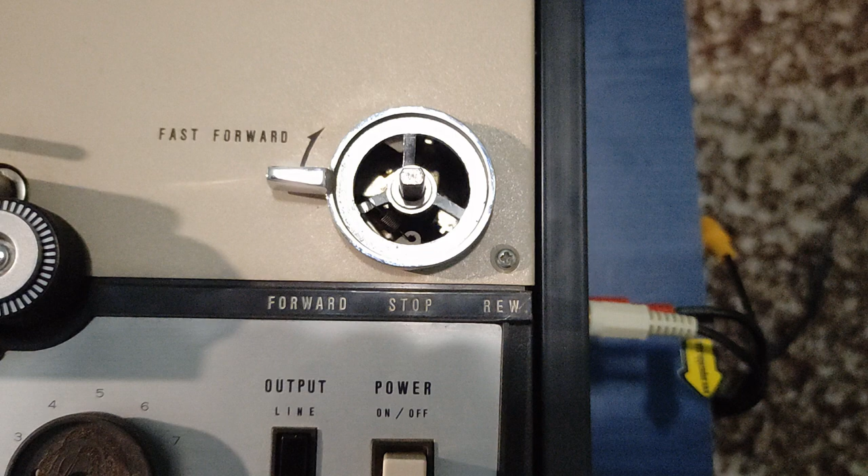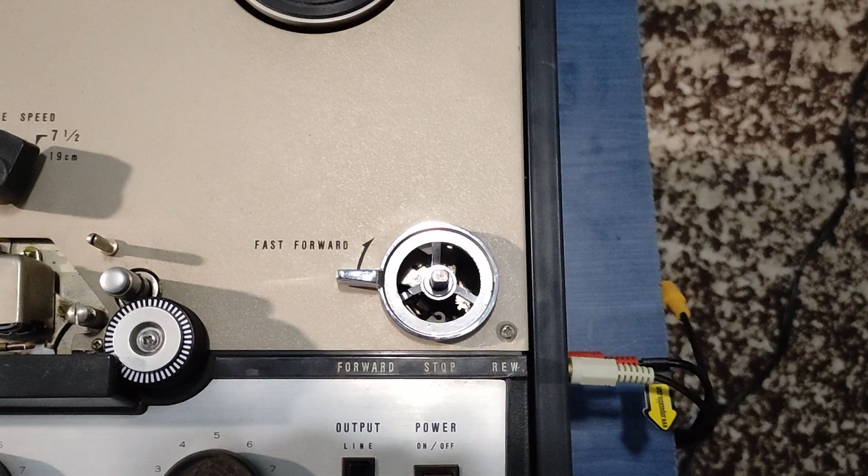So that thing here is missing. I will measure it, the height of it and everything. And I will show you the complete procedure of how to design it in Tinkercad, which I think is the easiest way. The user interface is very easy for anybody to try and design 3D parts.

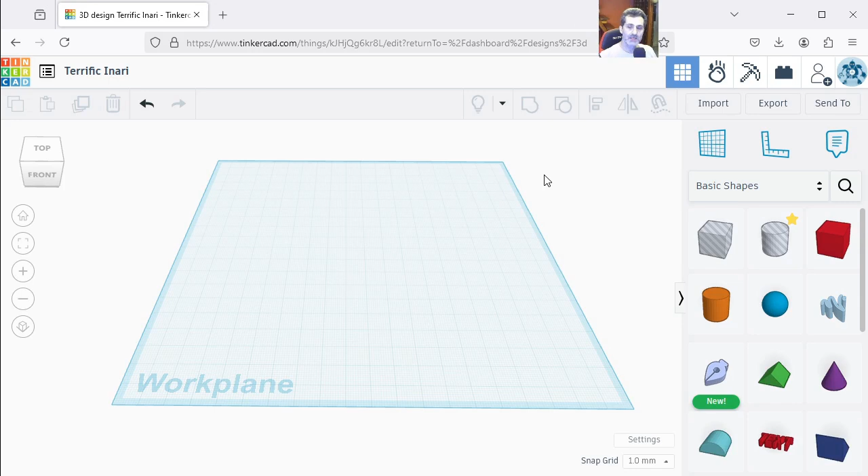So this is the initial screen we are presented with when we start a new design. Here we have a randomly given name. I will change this to SONY TC200 lever, it's called, anyway, whatever.

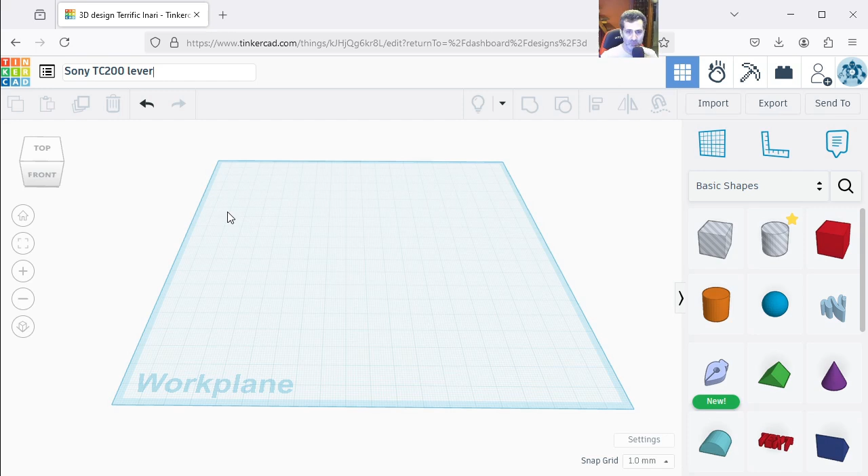I will go now through the whole procedure. So we have an empty workspace here. We can zoom in and out, experiment with the buttons and find what does what. We can rotate it like that, and we can move it. So I have here the measurements, I don't know if they can be seen. Okay, but look how it is. First, I will go through the whole procedure and I will talk, expressing my thoughts all the time so that you get familiar how that thing works.

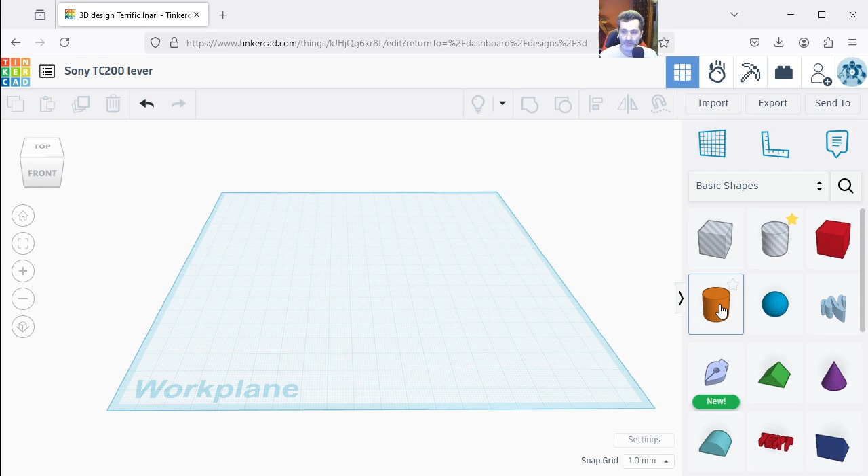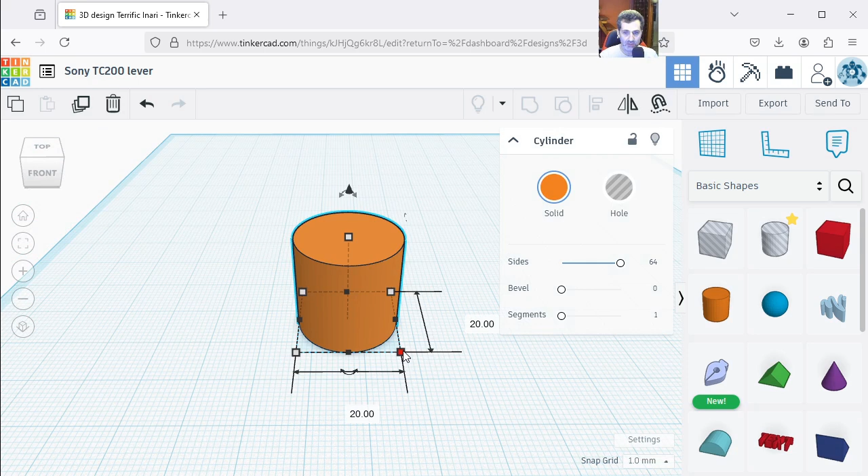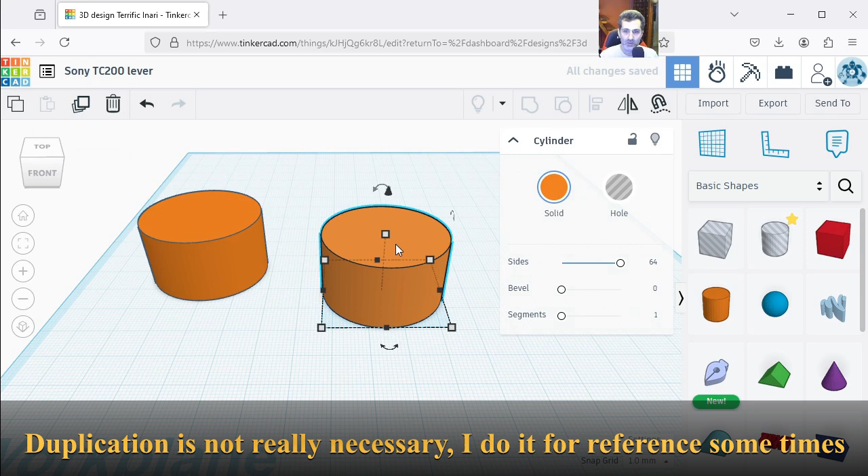So let's put here a cylinder. So we have the cylinder. I do sides to maximum when I insert a cylinder, you see, so that it's completely round. And this cylinder is the outer diameter of the whole thing we have, which is 36 millimeters. And this is also 36 millimeters. I will duplicate this with that thing here, and I will take one part and leave it there. Then this, I will make a height of 2 millimeters.

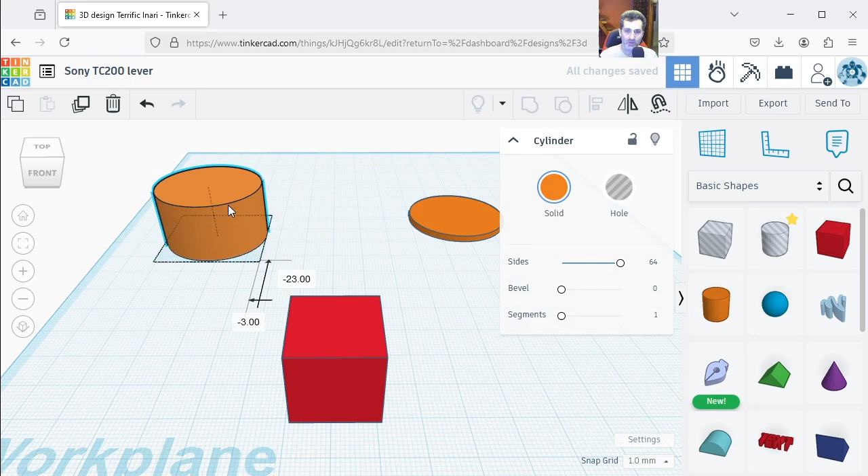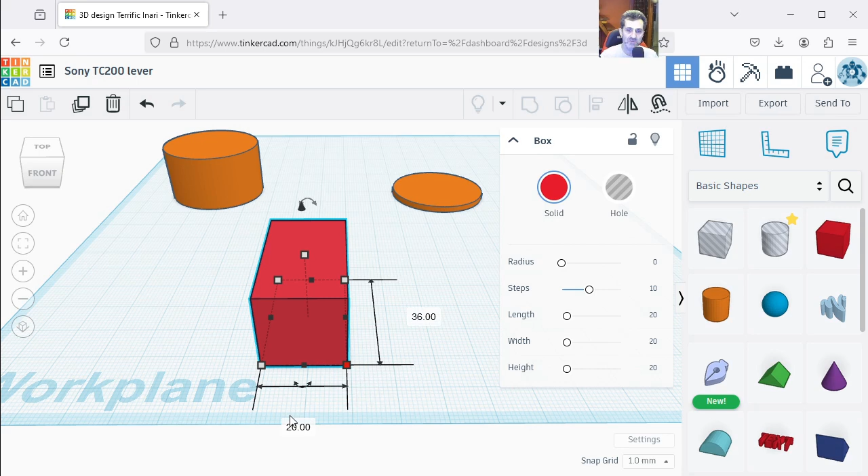Okay, now let's do the middle part where somebody can grab the lever to turn it. I will take a cube here. You can move the object just like that. I will take a cube. This cube, one side will be 36, the other I want it to be... so how much do we need to grab it? I think from 15 would be okay. So that will sort of be here somehow.

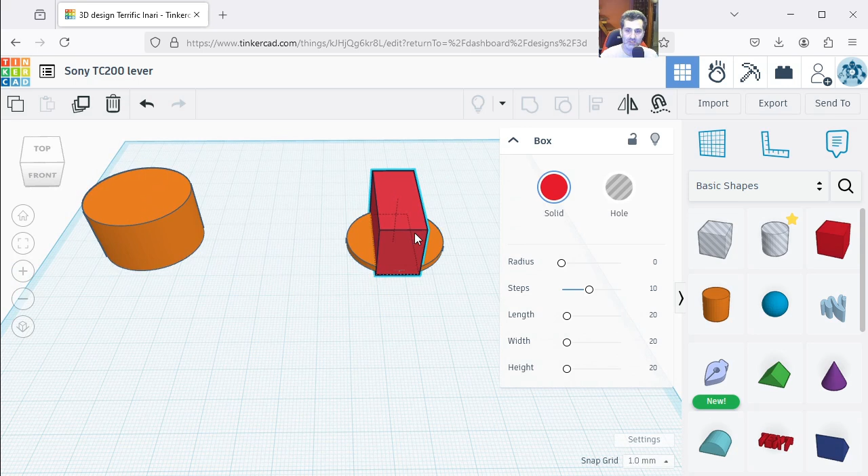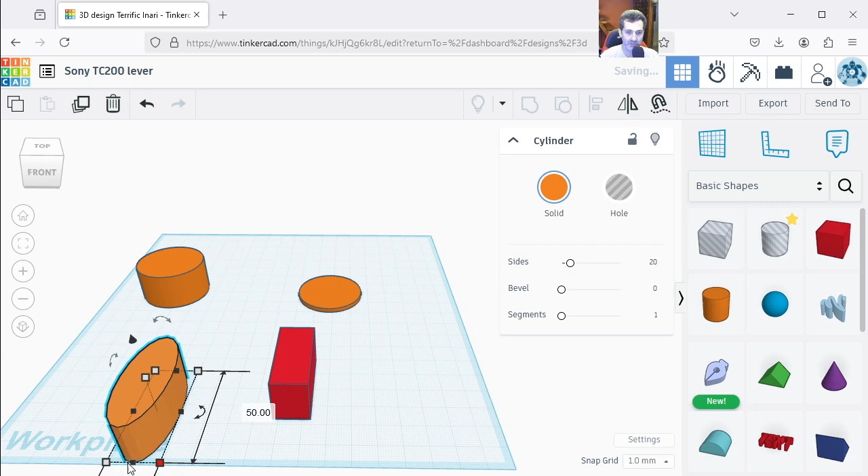Okay, but I want to cut it on both sides to be round like this one here. Let me show you how we can do this. So I take a cylinder here and I will make it big. Let's say 50 by 50.

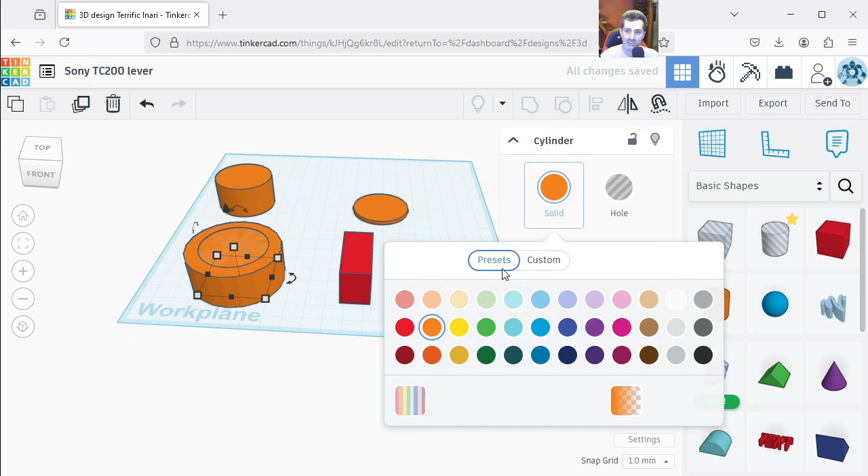Okay, then I will duplicate this cylinder, take it here and put it here in the middle. I will change the color just like that to be able to see it. And now I will center both with this here. I will align them. Now they are both centered. Now the inner one, I will make it a hole.

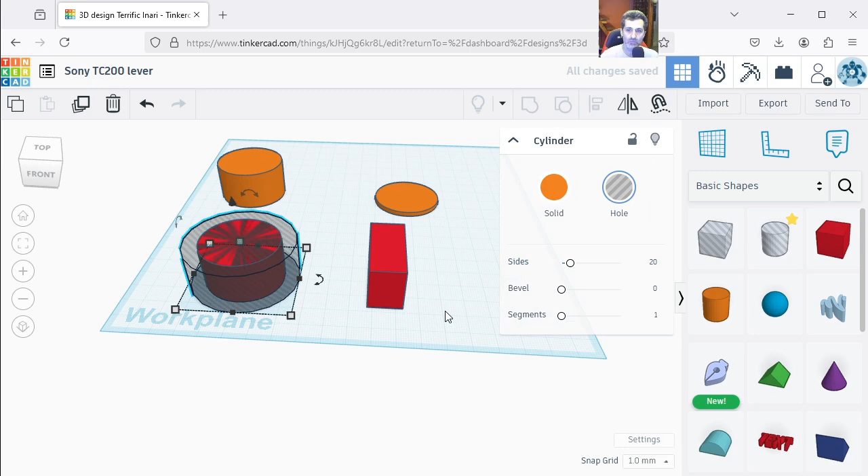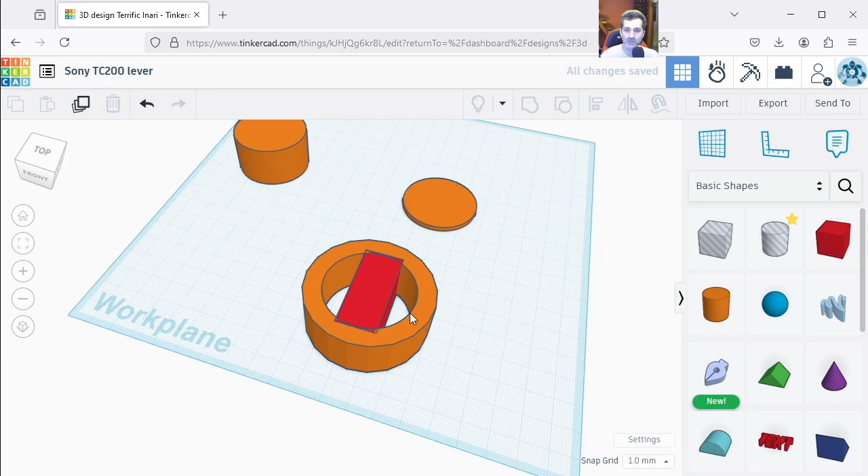No, the inner one should be made a hole, is it? Yes. So now when I combine them, you see the hole is formed here. Now I will put the two here. I will align them just like that. Now they are both aligned, and that I will make a hole. So now if I combine these two, now you see that this is round and it fits perfectly here.

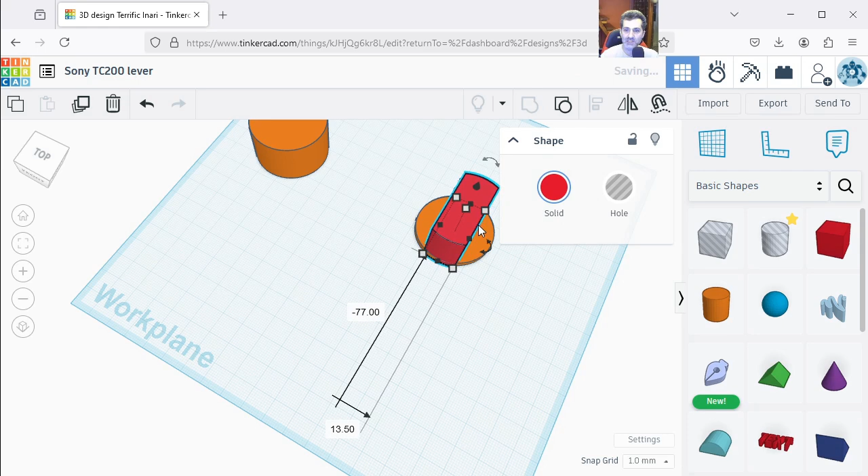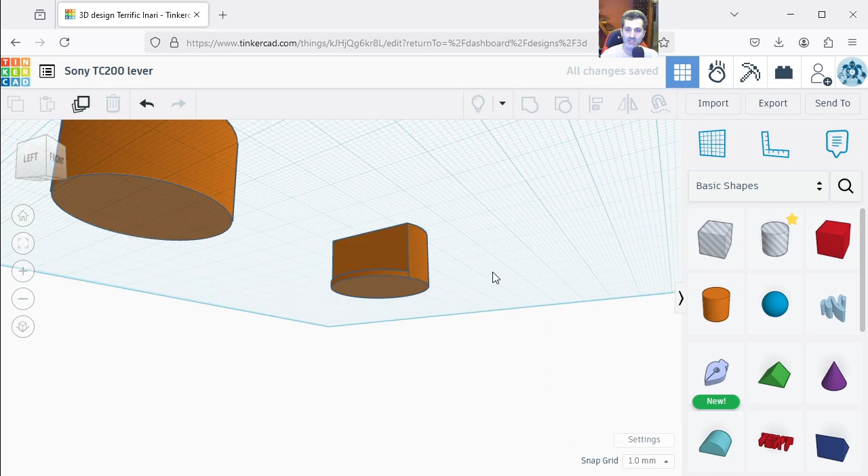Height 2 centimeters, I think it's okay. So now I will align these two by pressing here. You see? Now I will combine them, and I have a basic shape of my lever. I think I did something wrong, because the diameter was 36 and I should do it smaller. So this one I will do it, I have to do a lot of changes.

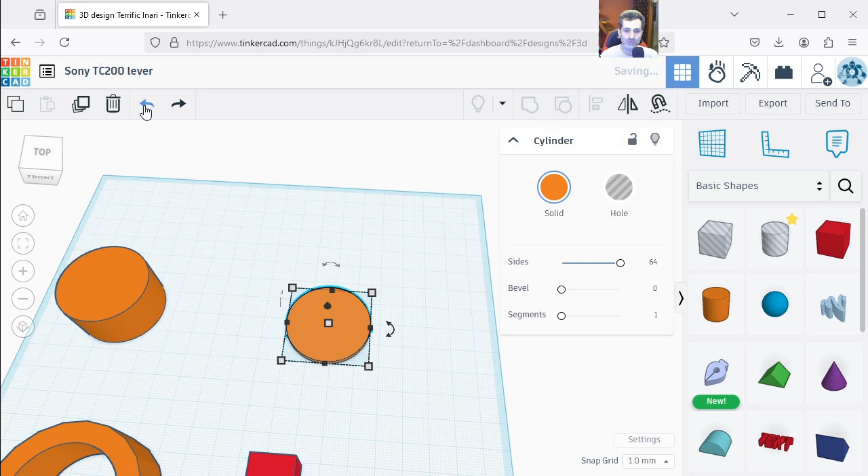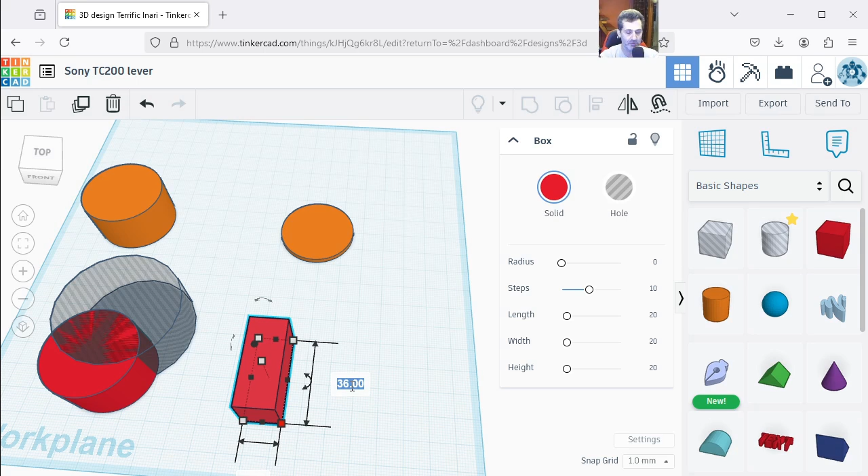I should not do it like that. So this should not be 36 but 35. 36 is the overall we have. This should be, so I mean it must be a little bit smaller so that it fits. So that way it's half a millimeter less from each side, 1 millimeter in total. So this will be also 35.

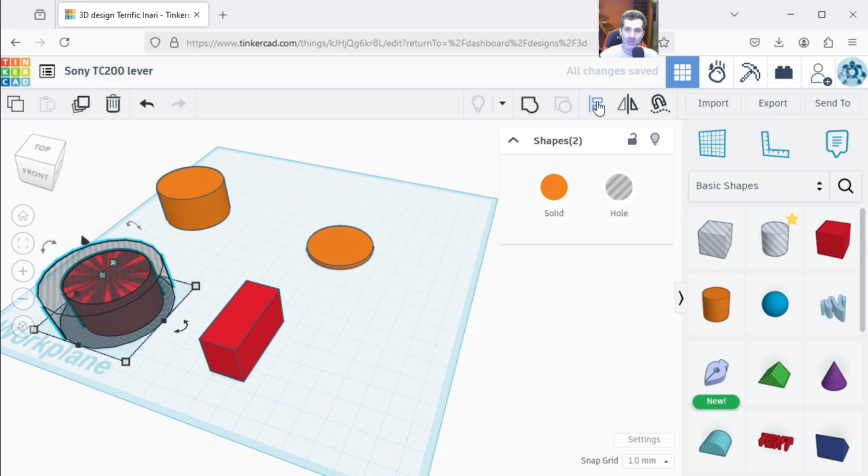And now that one I will do it also 35. That was a mistake I did, but like that you can learn, because we all do mistakes, and I also did a mistake. I will align this again, this side and this side. Now they are aligned. Now I will...

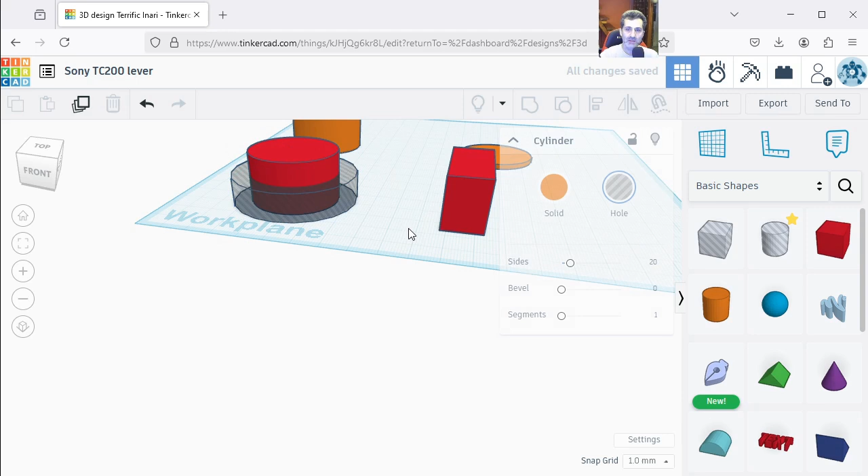Make this a little bit smaller. I will make this a little bit higher, and then in this I will make it 20 as it was from the beginning. Now I will turn this a solid, but this a hole. Like that, when I combine them, I get that hole in the middle.

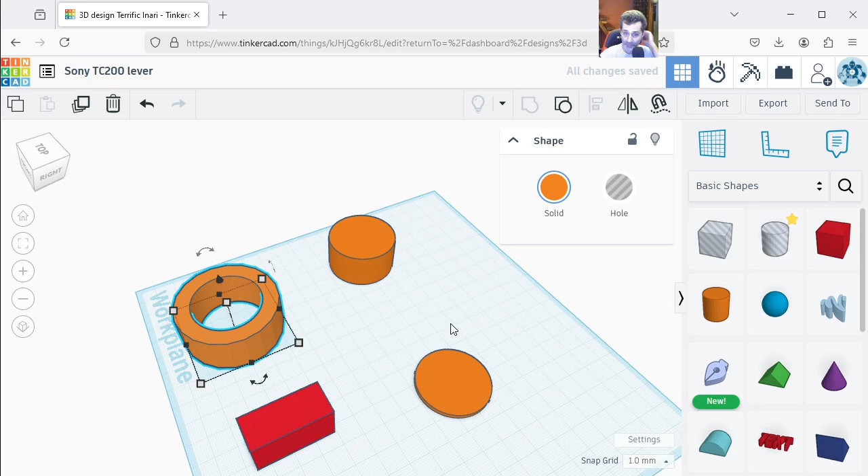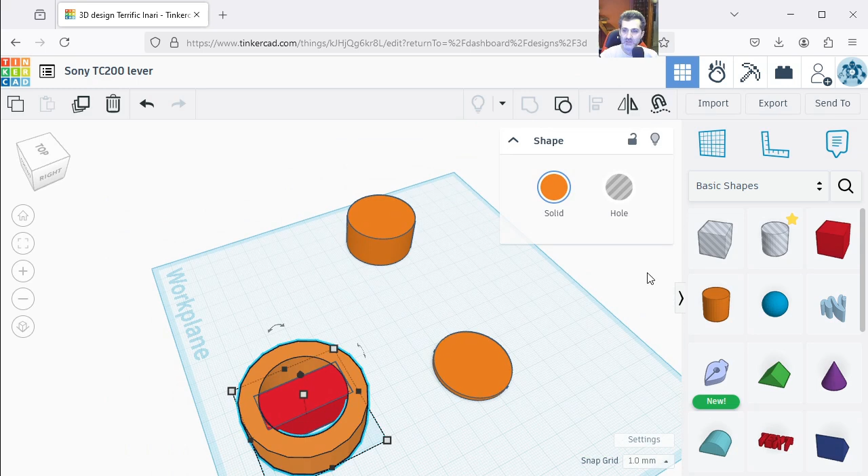Now I will align these two just like that. So this is aligned and this is aligned, so it's aligned from both sides. Now if I turn this a hole and I combine these two, I get the shape I want.

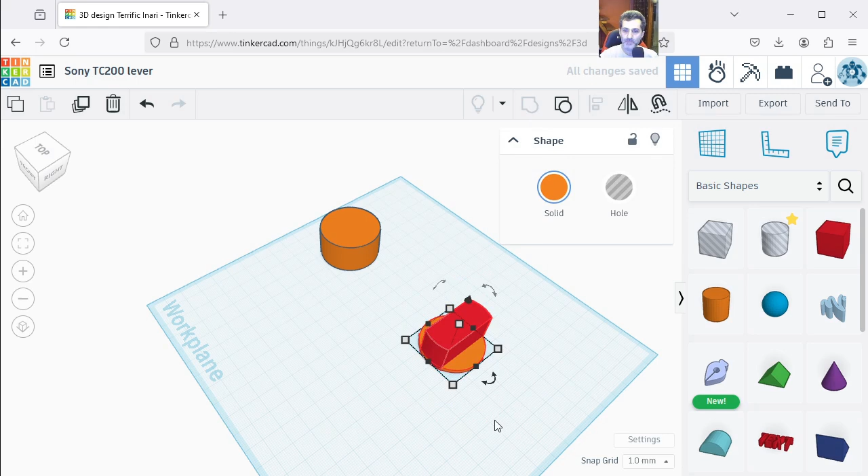Now if I align these two, they are already aligned, and I combine them, please be combined. Yes. Now we have the basic shape of a lever here to turn. Now I have to do the shape of the middle axis.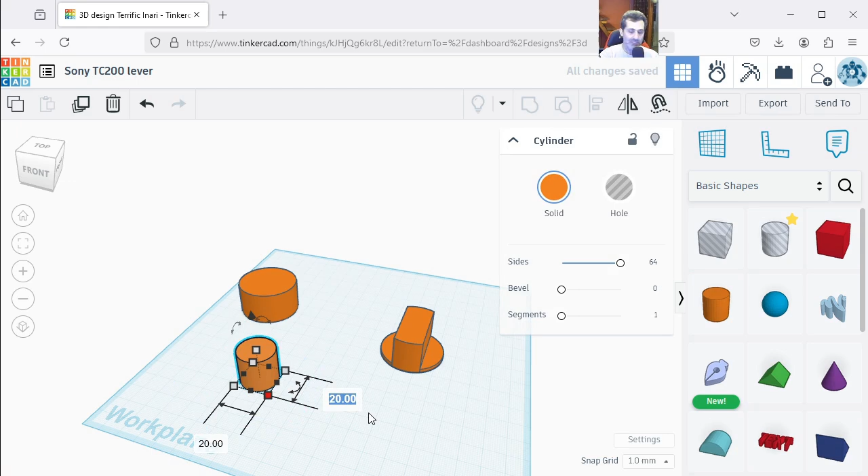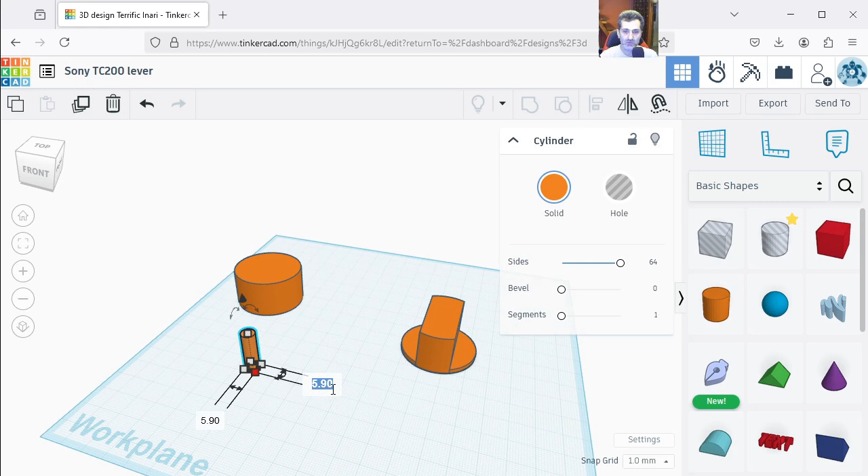Let's see, I will take a cylinder here. So the outer diameter is 6, so I will do 5.9 on both sides. No, if this is 6, that should be 5.9. And I hope that it will fit.

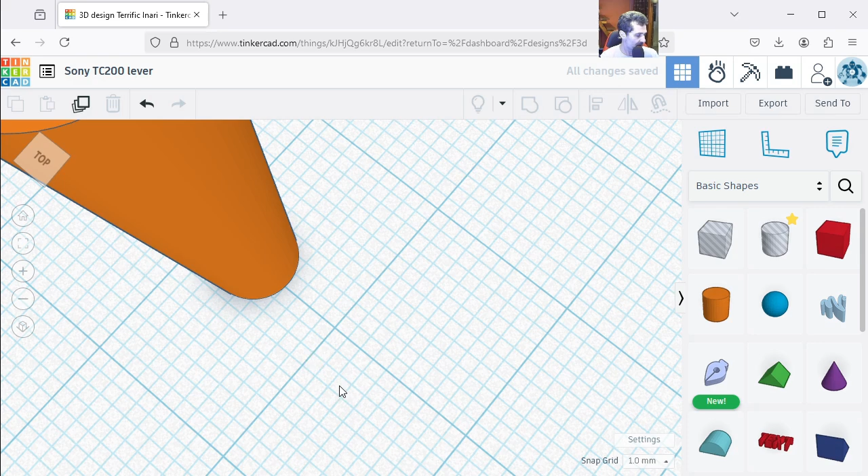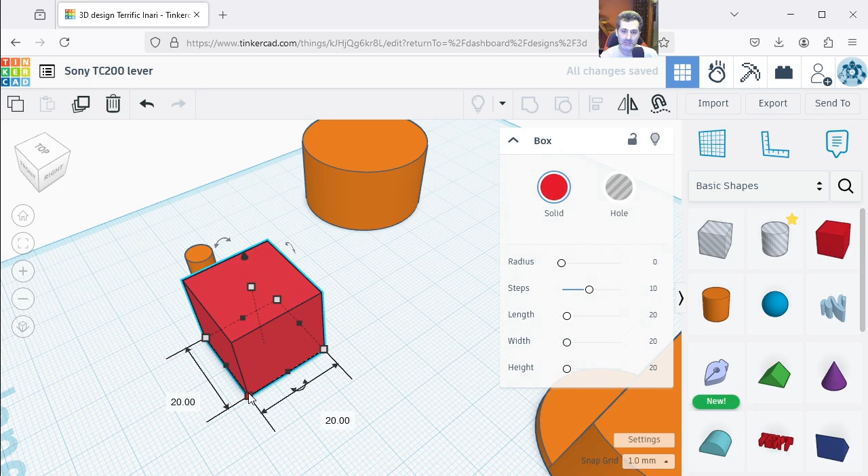Now the problem is that the other part, which should be here and here, I will show you, the other part is 4.5, so I will do it 4 millimeters. Let's see. If I take that, I will do here 10 and 10.

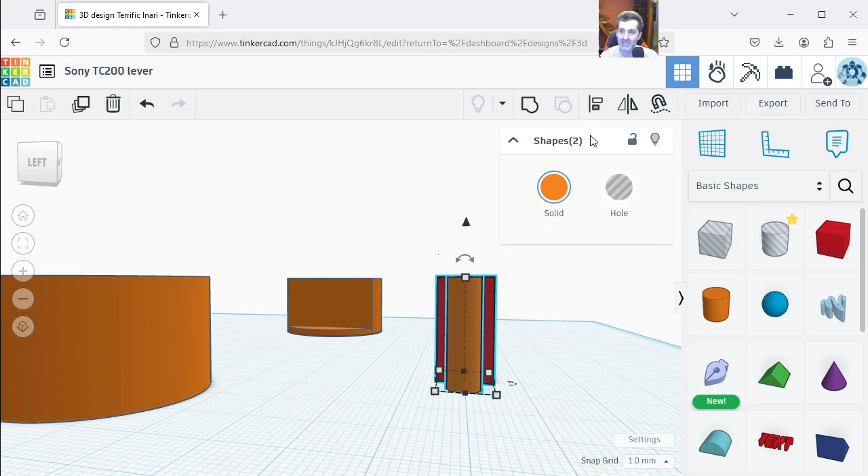Let's see if this line here is in the middle. 1 2 3 4 5, 1 2 3 4 5. Now I will do this, the other one, to be in the middle by aligning the two. Okay, now this line is in the middle of that thing also.

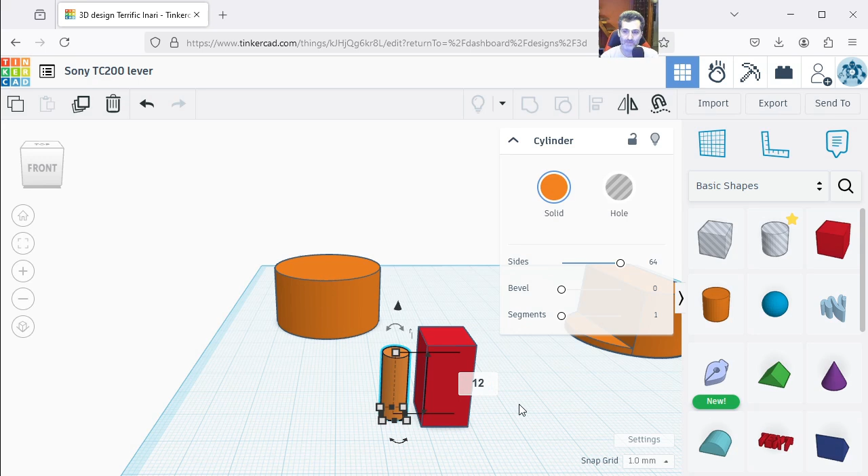Now, so how tall do I want this to be? So the height we have is 13, so I will do this 12. Now, two millimeters this side and another one 2 millimeters this side.

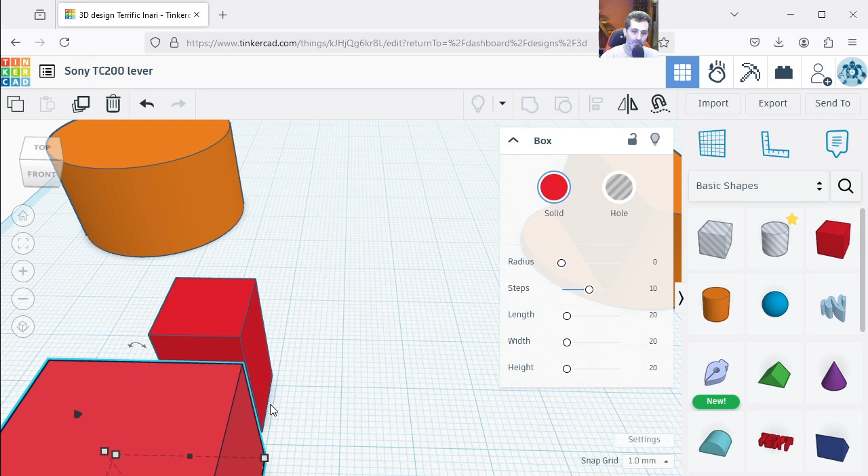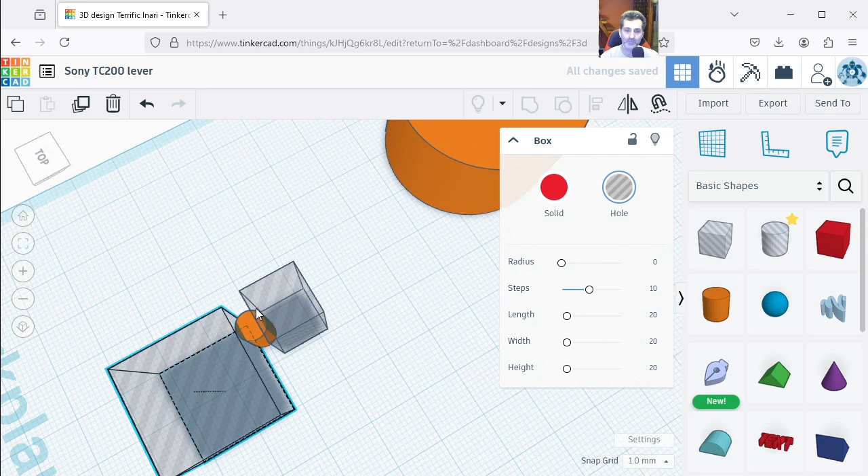Okay, do you see what I did here? So if I turn this a hole and I turn this also a hole and I combine these three, how does this look like? You see, now this looks like the middle axis of the knob, of the lever we saw.

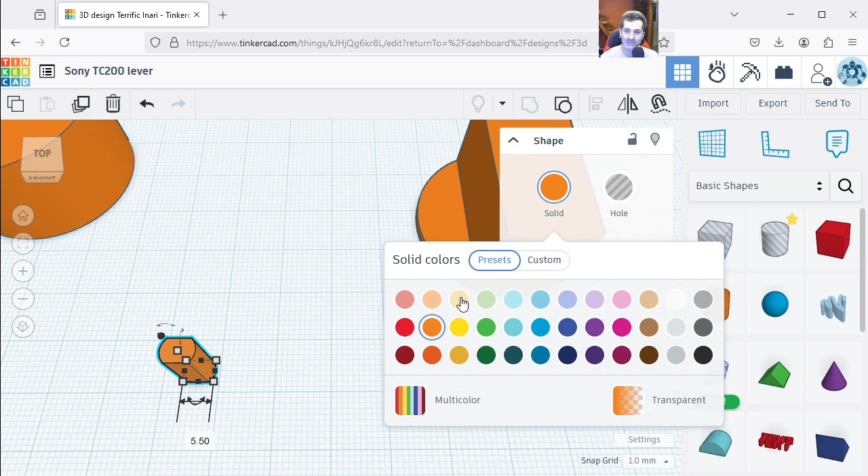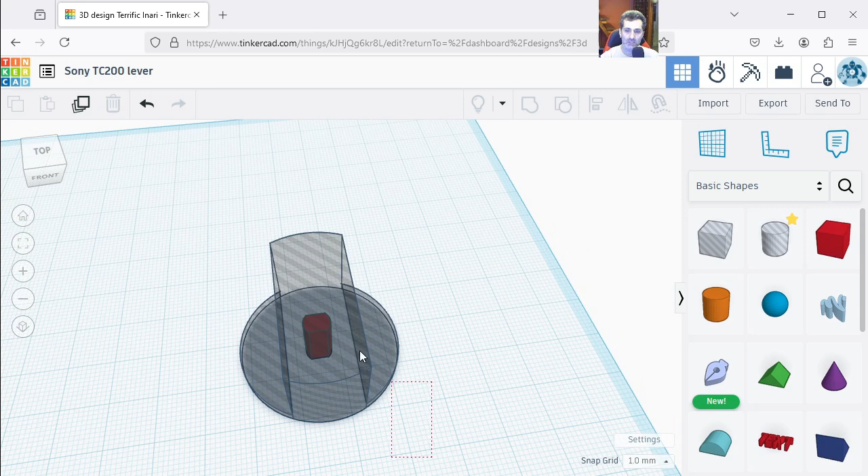So we must put it here in the middle, this one, and deduct it. Look how this can be done. I will make this a hole so that I can see inside. I will put it there, that thing. And I will select both and align them.

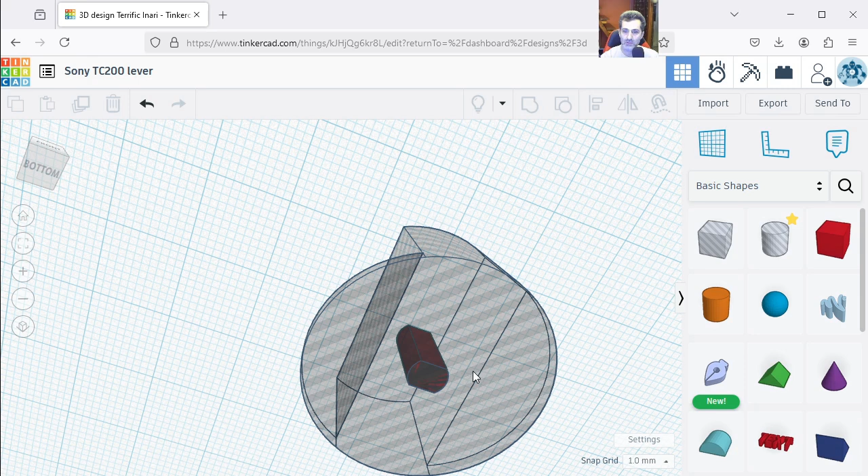So now we know that this thing here is exactly in the middle. I will do now the opposite. I want to select that thing, and I will turn this hole and I will turn this a solid.

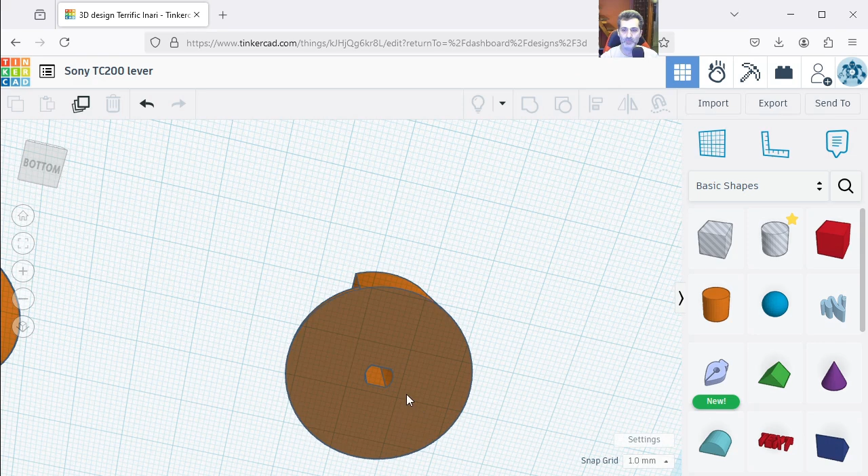So now if I select them both and combine them, what do we have now? You see, we have the hole for the middle axle to go in. If I make this a hole, you can see how it is cut in there.

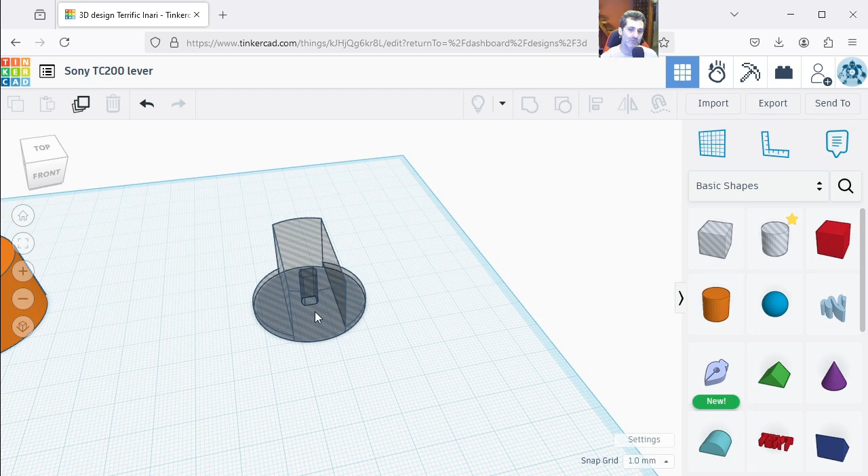So that thing might fit already and work, but I will add 2 screws, one from this side and one from the other side, with diameter 3 millimeters, so we can screw them in and hold this in place much better. Let's see how we can do that.

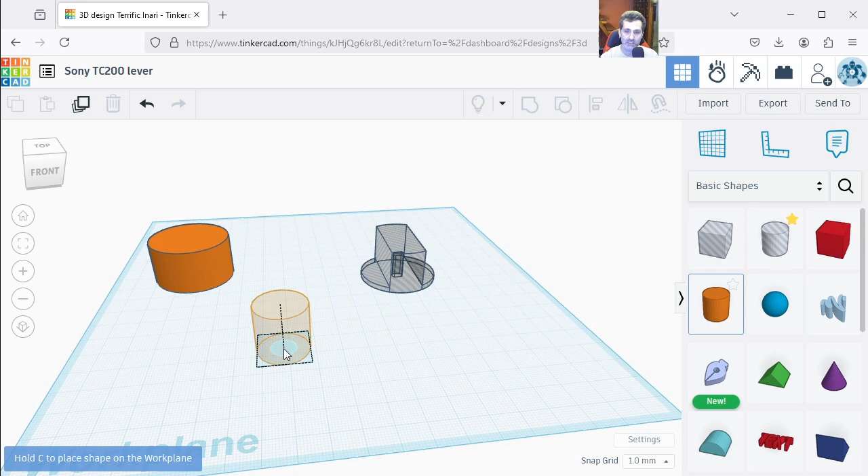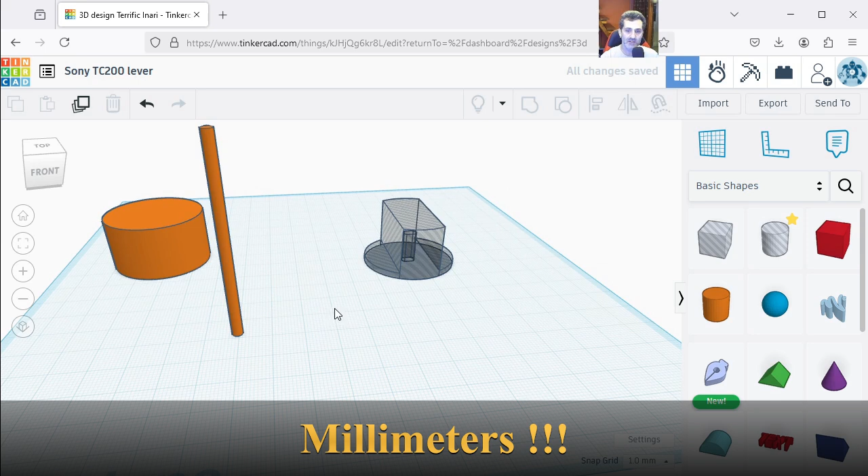I take a cylinder here and I make it 3 millimeters here, and 3 millimeters here. I will make it big enough, and then I will rotate it 90 degrees.

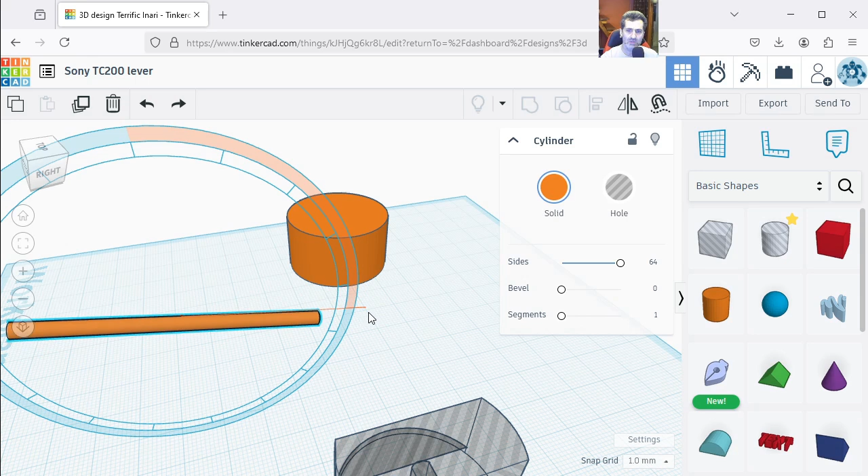Did I do it exactly 90 degrees? Tuck, tuck, tuck, tuck. I should be able to see. No, let's go again. 1, 2, 3, 4. Now it's rotated 90 degrees.

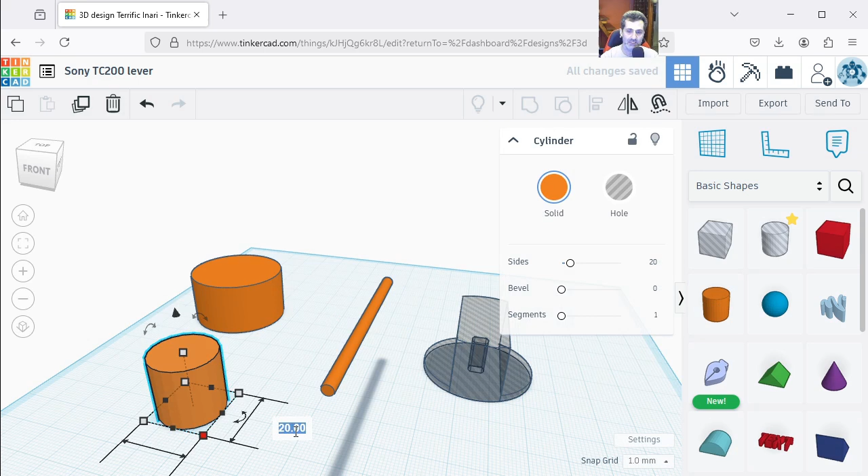And I will take another one. I will show you why. And instead of 3 millimeters, I will do it 6 millimeters. Let me show you, 6 millimeters and 6 millimeters. And this one I will make it also big, and I will also rotate this.

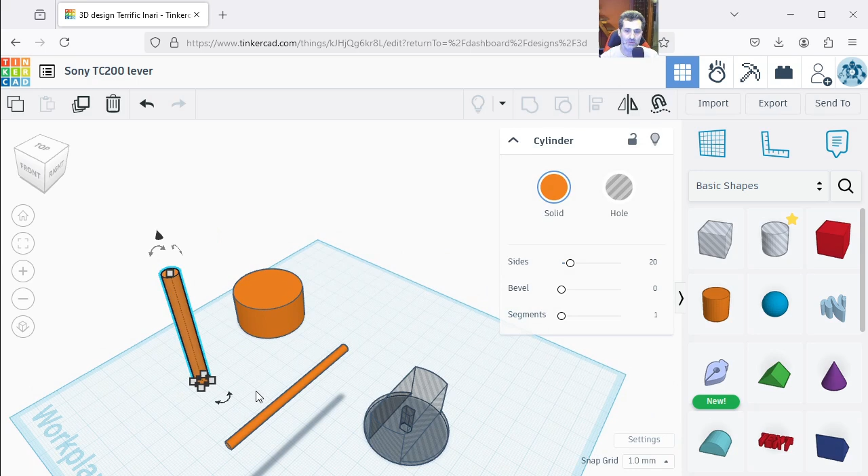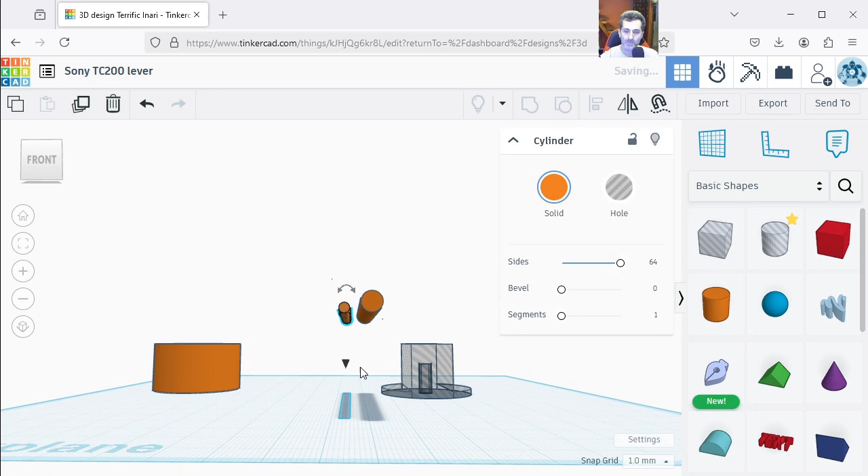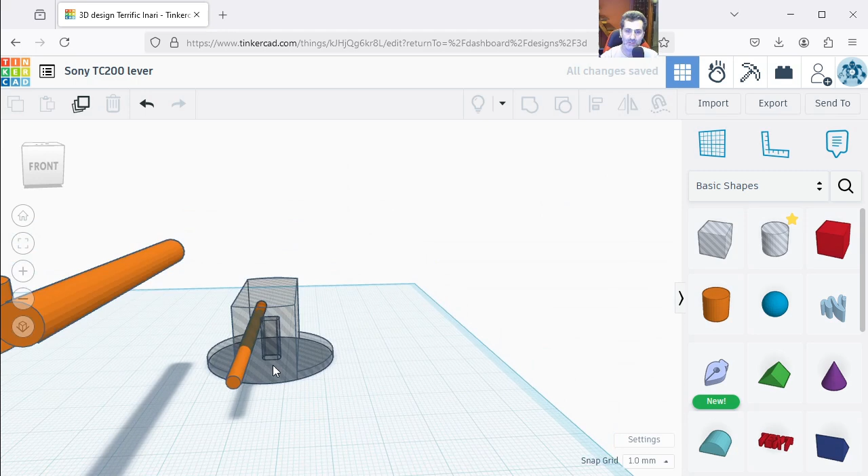Now I'm gonna put this to fit in here, just like that. Do you see what I'm trying to do here? Then I will also do the same with this one.

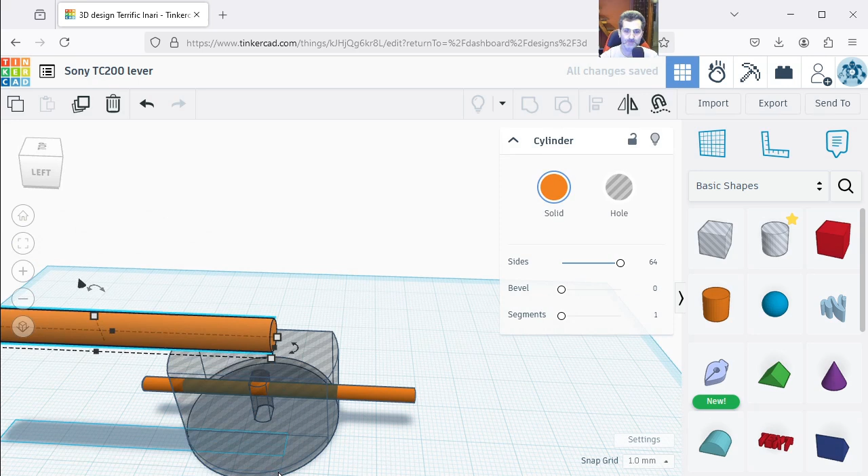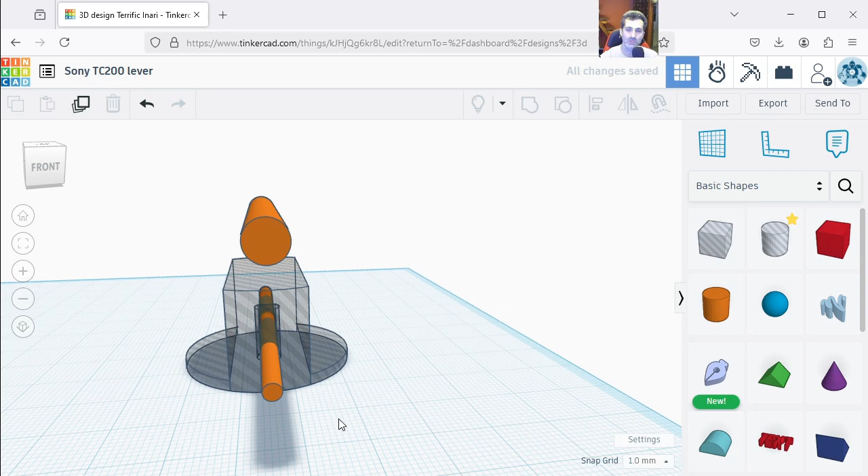So I will align all these, so now they are all, let's see, they are all exactly in the middle.

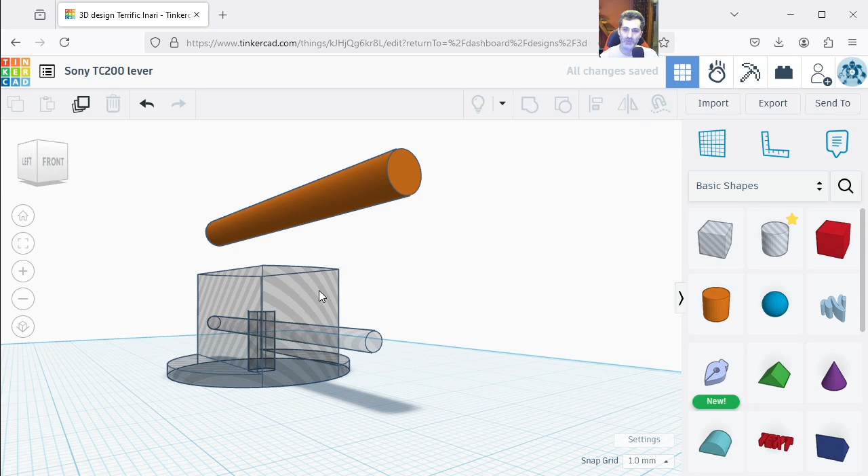So look now what I am going to do. I will turn this a hole and this a solid. Now I will combine this, and look now, I will turn this hole so that we can see inside. You see what I did?

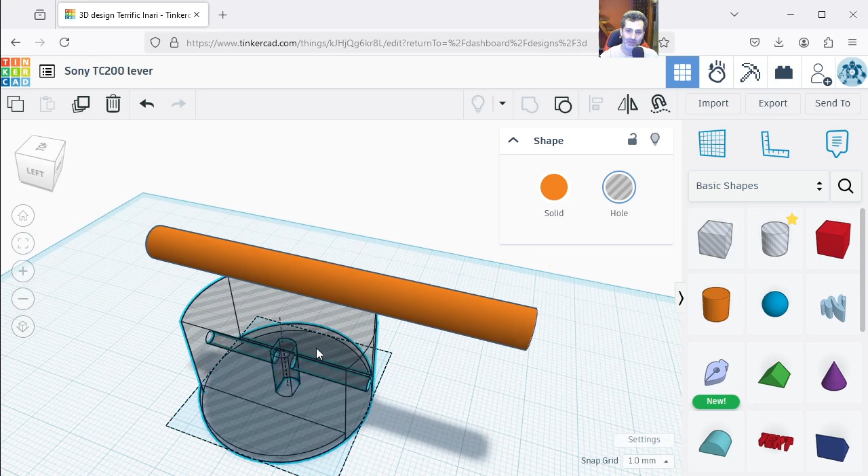So we can screw in a screw that will block on this metal piece in the middle and stop the whole thing from moving. But I want to hide the head of the screw somehow inside, and that's why I did that thing here. Let me show you what I am going to do.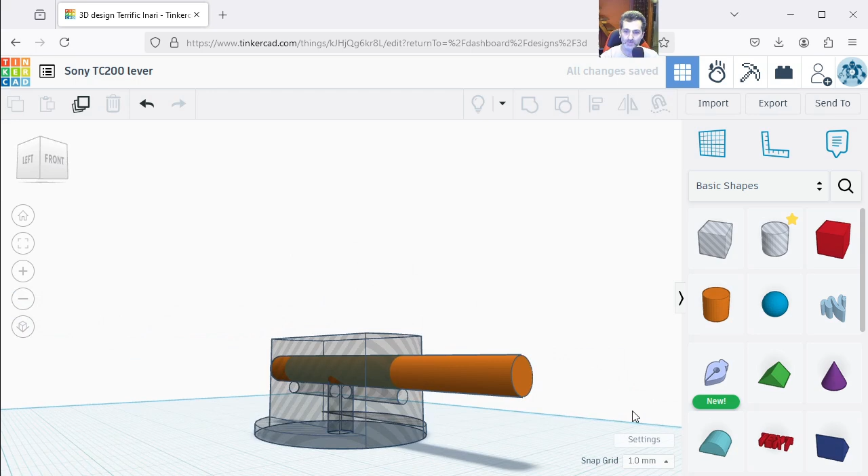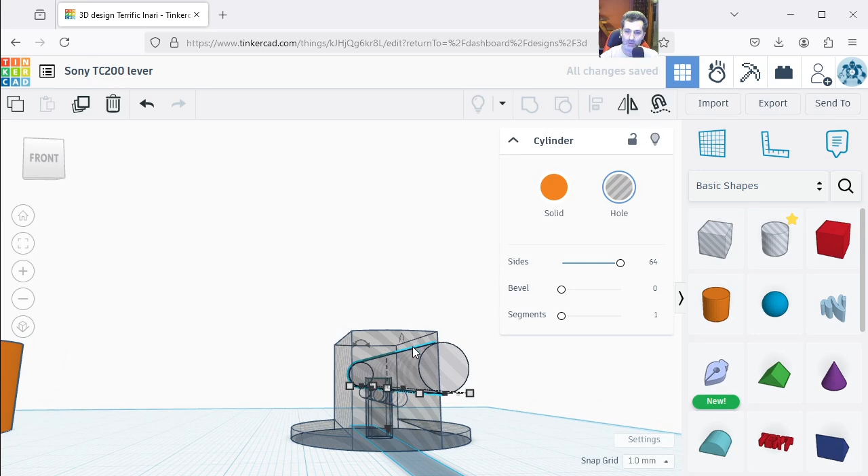I will turn this also a hole. Is this now in the middle? No, it's not. But now I think it is exactly in the middle.

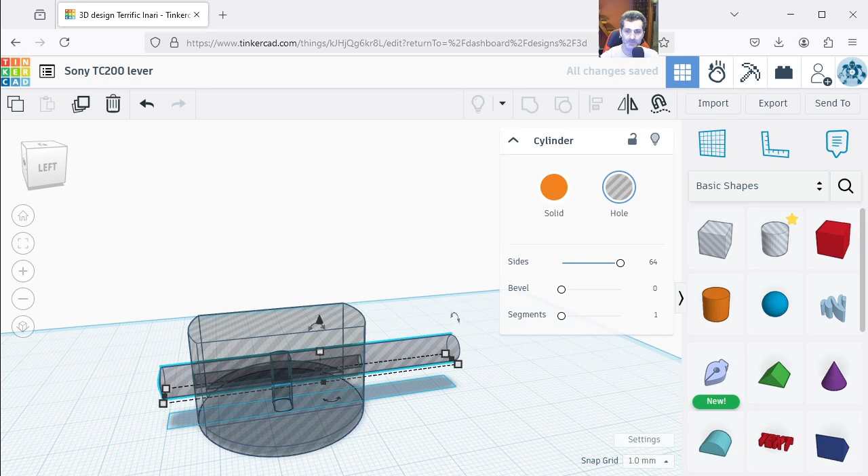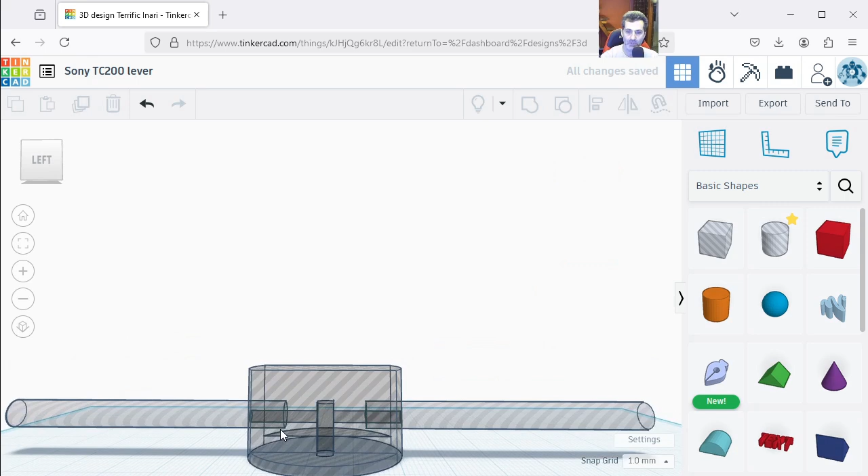I will duplicate this and I will take this out. Then I will take this there and this one there. You see now what I have?

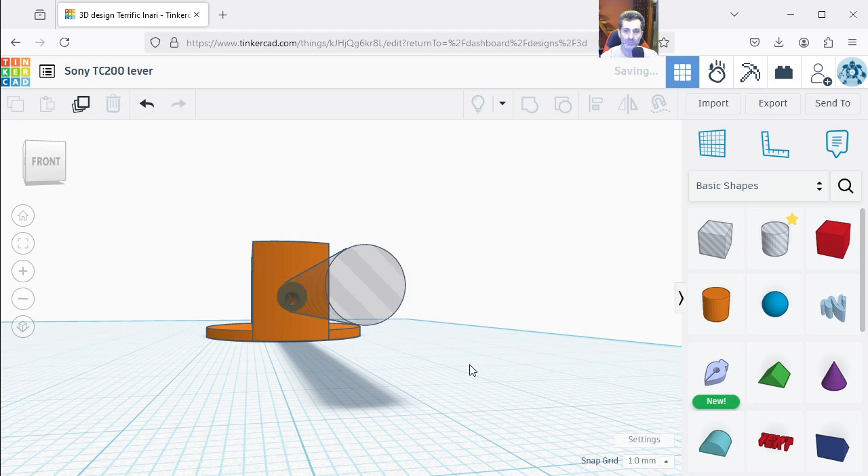You will understand really quickly what I'm trying to achieve. I will make this a solid and I will combine all of this. And now I have, no, it's not exactly in the middle. I'm gonna take this back. It's never in the middle.

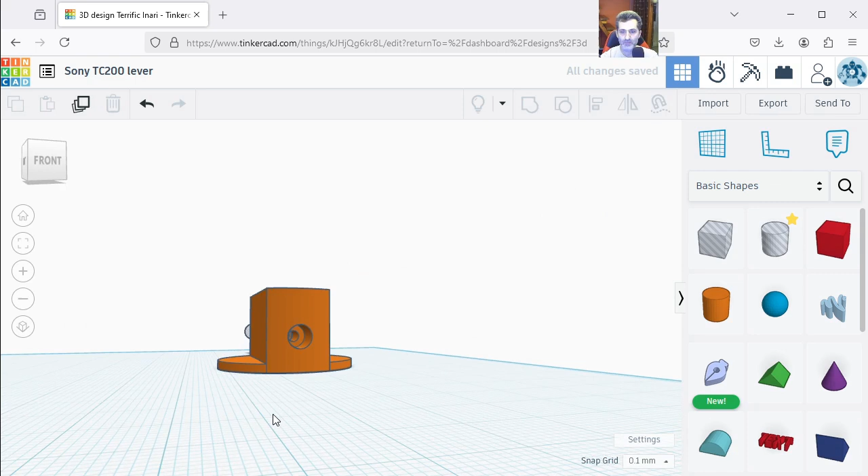I will do it as good as I can. Now it looks nearly in the middle. I think this is okay. I will combine these two, and this is fine. The other one is not in the middle.

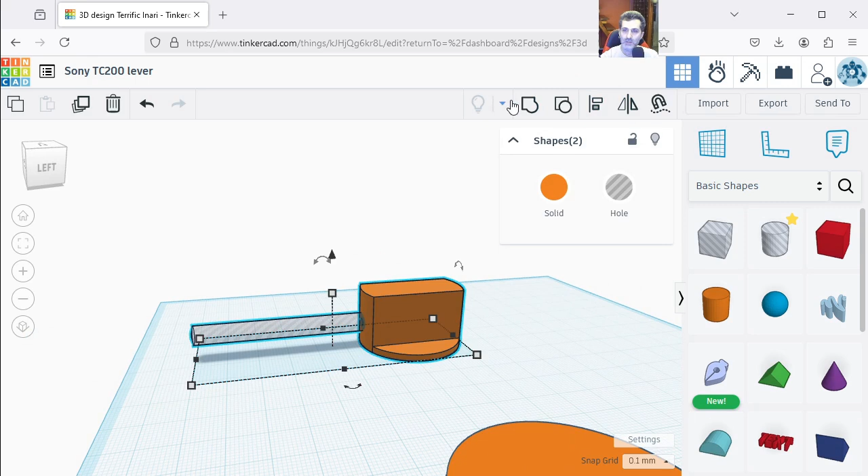I will pull it down a little bit. Now it looks like to be in the middle. Let's combine them. And now we have our finished part.

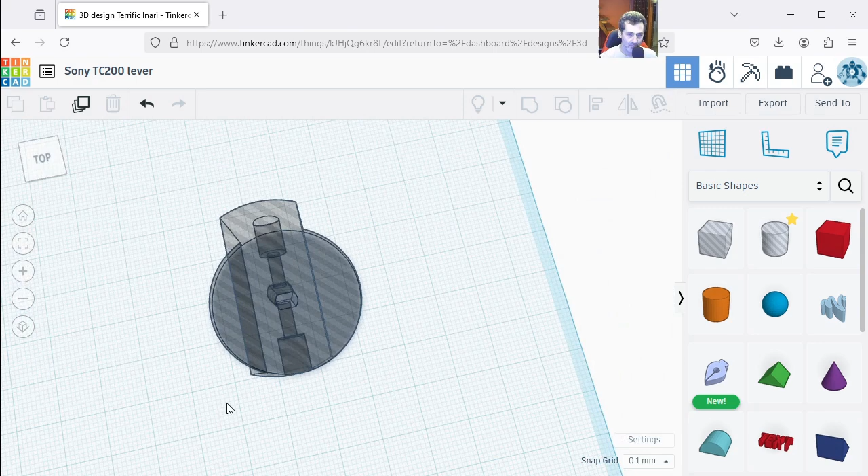You see what I have here? If I turn this hole, you can see exactly what we designed. I don't know if you can see it, but this is the finished part that I'm going to 3D print and fit there, and I hope that it will fit.

Sometimes it doesn't. For example, this might be too small and the inside part cannot fit in, or such problems that I have many times. But I made this video so that I explain to you how to design parts, and I think this is enough.

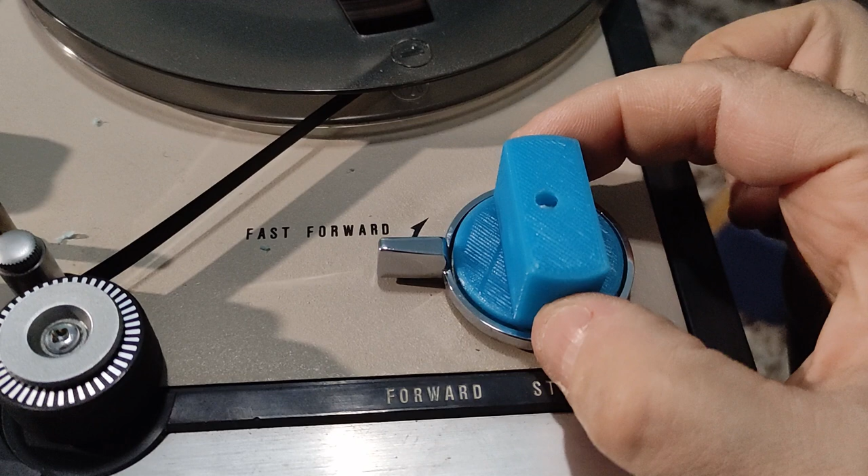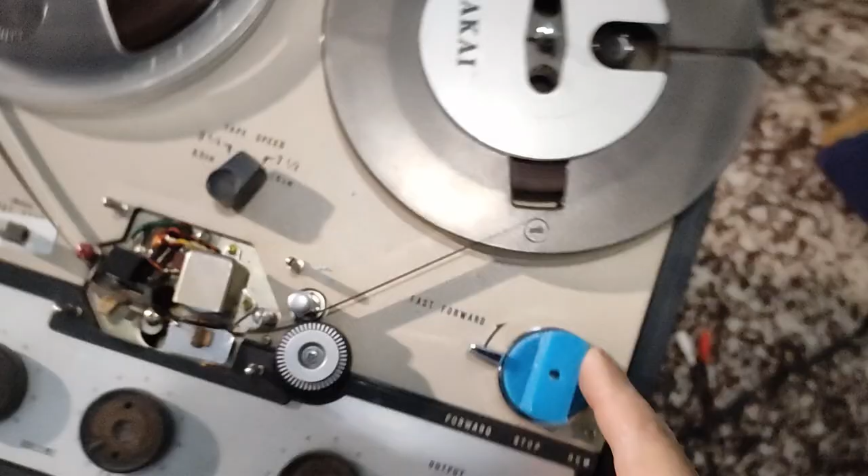So I did a mistake. I showed it on the video earlier that the middle hole from the bottom, for that, I made it smaller although I should have made it larger. But luckily the screw that I foresaw here and here, you can see. So I drilled the hole later, and accidentally it came out from the other side while I was drilling.

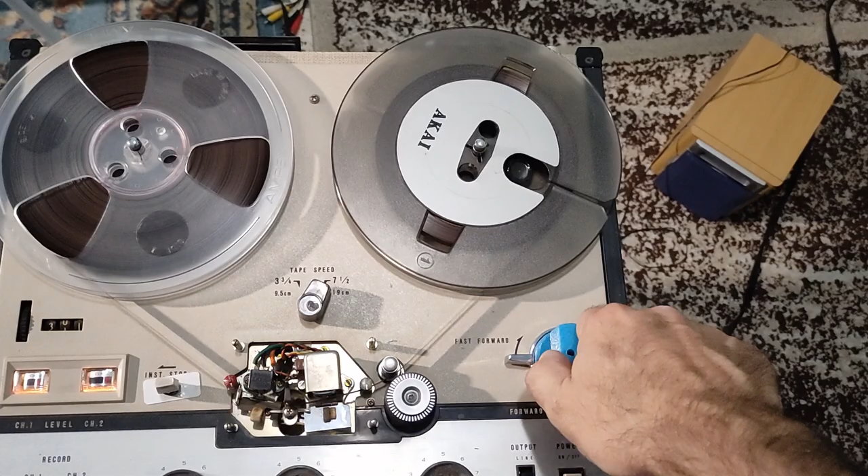But anyway, using this screw I could sort of press the middle axis, and now look how nice it works. It's very easy to work on, and I'm not gonna do it again to try and make it fit directly, because it looks like it's working normally, so I'm not gonna do anything else. That's it. Bye bye.